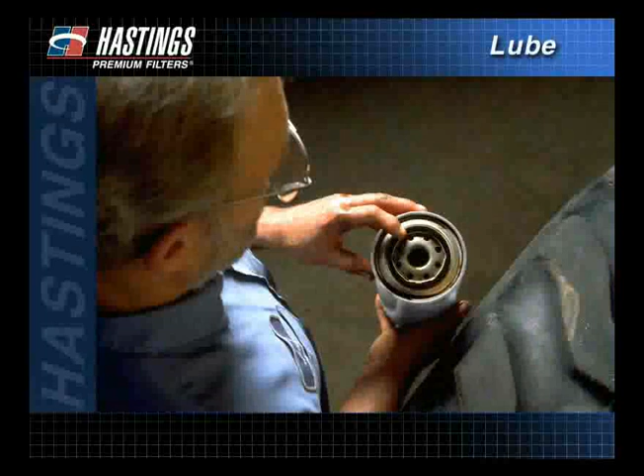Even with proper oil and the best filter system, problems can occur. As part of your maintenance practice, occasionally inspect filters to detect the beginning of serious engine problems.

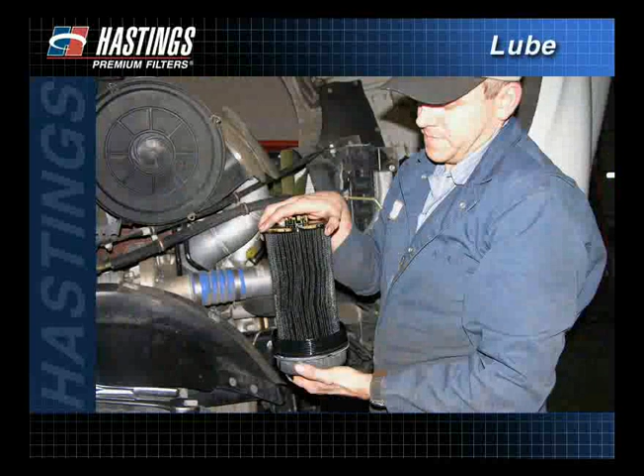With a cartridge-type filter, the analysis is easy. Simply take the filter out and look at it.

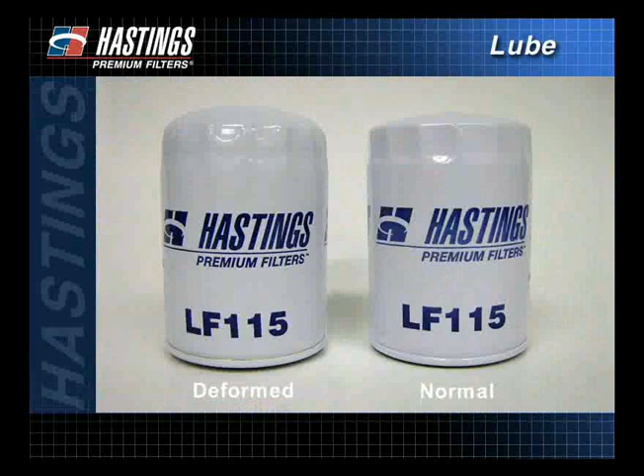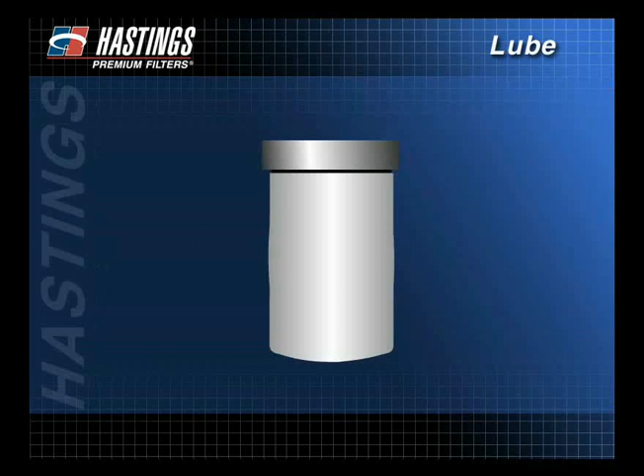Spin-on filters, however, need closer inspection. Often a deformed spin-on filter, due to overpressurization, is the only sign an equipment owner has that a problem exists in the lube system. Deformed filters are the direct result of excessive lubricating system pressure, which is caused by a stuck or malfunctioning pressure regulator valve in the oil pump assembly. This problem should not be attributed to the filter.

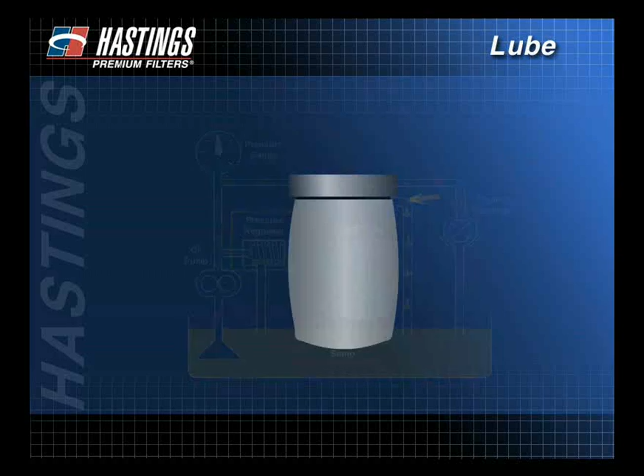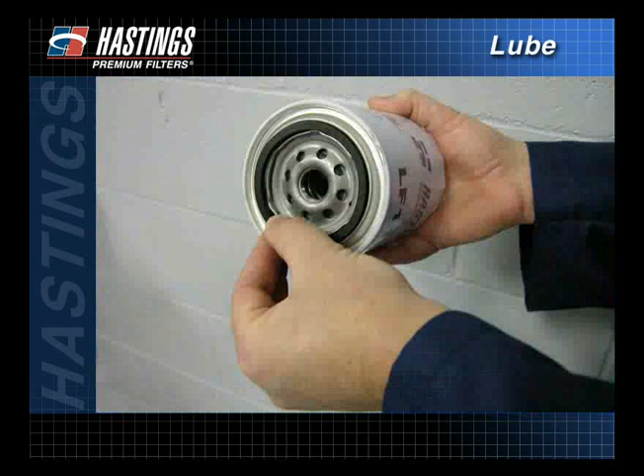Gaskets are displaced from filters due to excessive lubricating system pressure, insufficient gasket compression, or a combination of both. Generally, if the gasket is properly installed, the filter will become deformed before the gasket is displaced.

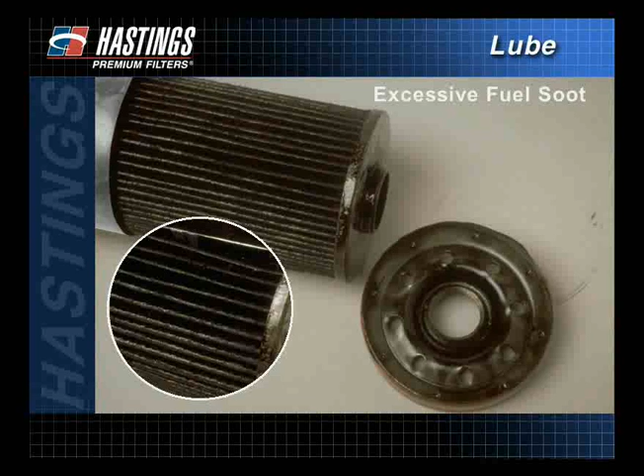Inspecting the inner element may detect additional problems found in the lube system. If the media is covered with a thick, loosely held sludge, it is an indication of an excessive amount of fuel soot. This could be the result of a wide range of factors. Many can be readily eliminated by a mechanic who knows the vehicle.

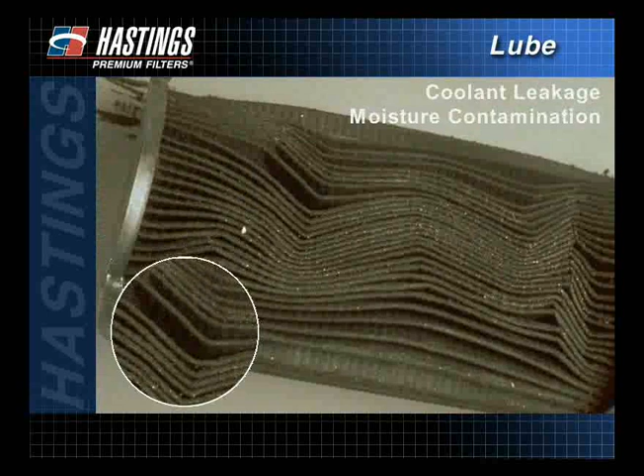Coolant leakage or moisture contamination will cause wavy pleats in the media and deterioration of the wrap. It may also cause a sticky, shiny, tightly held sludge on the filter media. A deteriorated outer wrap is another sign of moisture.

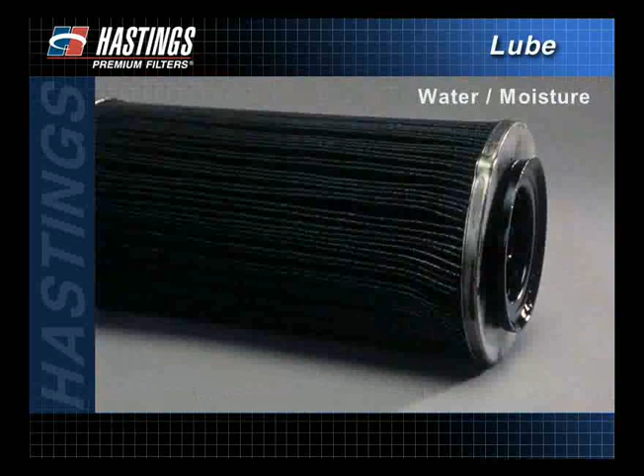Certain oil additives will trap water and cause a gel-like coating on the filter media. It may appear clean, but when tested, will show a restriction if moisture is still present.

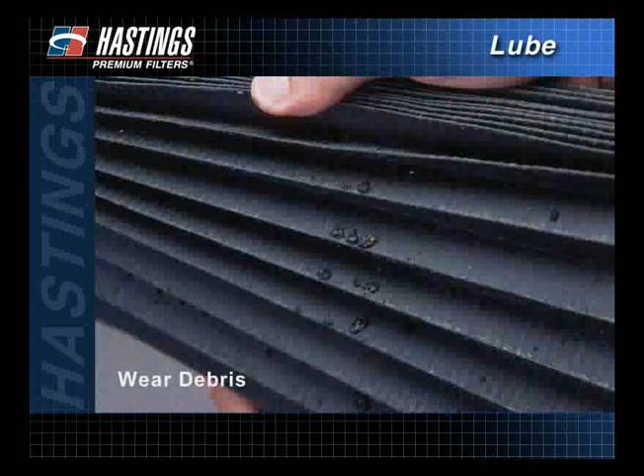Any wear debris on the media is a sign of trouble. An oil analysis can detect potential problems before catastrophic damage occurs.

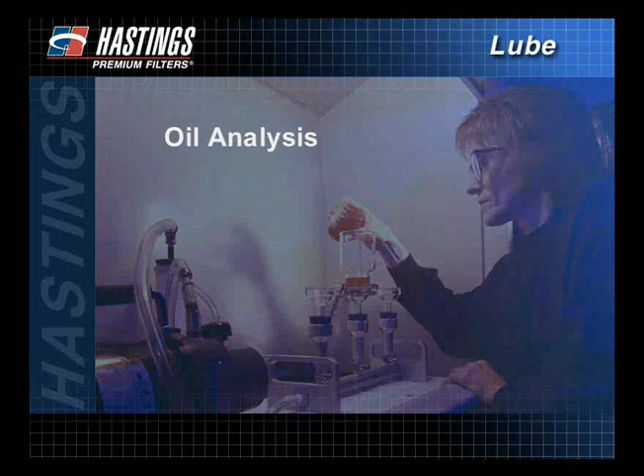Lab technicians can detect changes in lubricant viscosity, whether it has thinned from fuel dilution or thickened from contamination. Tests can also check the acid neutralizing additive to make sure it's still guarding against corrosion.

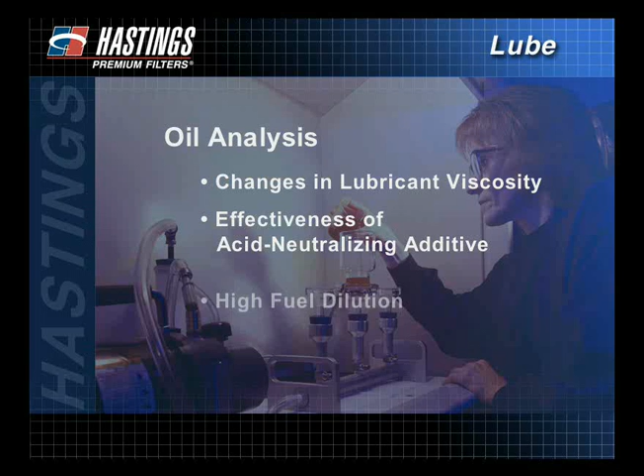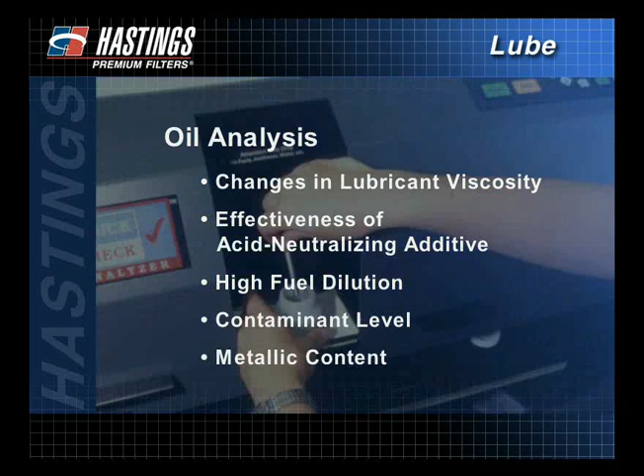Flashpoint tests can indicate high fuel dilution. A measurement of insoluble particles will determine the contaminant level, and the final test for metallic content is invaluable in determining the location of wear in the engine.

Keep in mind that although many improvements have been made in oil quality and additives, lubricating oil has a limited lifespan. Filters also have a limited lifespan. If they are run beyond their capacity, they can no longer provide protection to an engine.

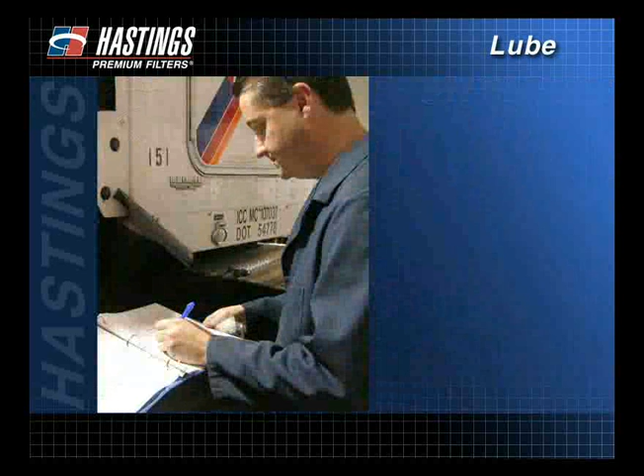That's why establishing drain and filter change intervals to incorporate economy with maximum protection is ideal. Many factors must be considered when determining a proper preventive maintenance schedule. Charts and guidelines plotting recommended change intervals are available from the engine manufacturer. Always follow the recommendations, and before extending drain intervals, discuss it with your engine and oil suppliers.

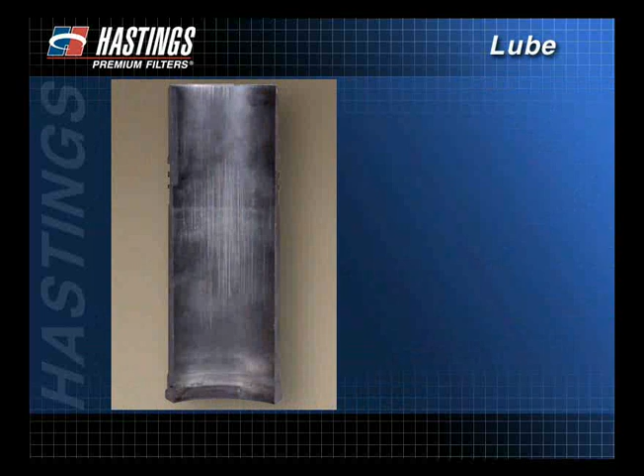Engine parts will tell if a proper schedule is being followed. By reading the writing on cylinder walls, pistons, bearings, and other sealing surfaces, a fleet manager can determine whether his PM program needs attention.

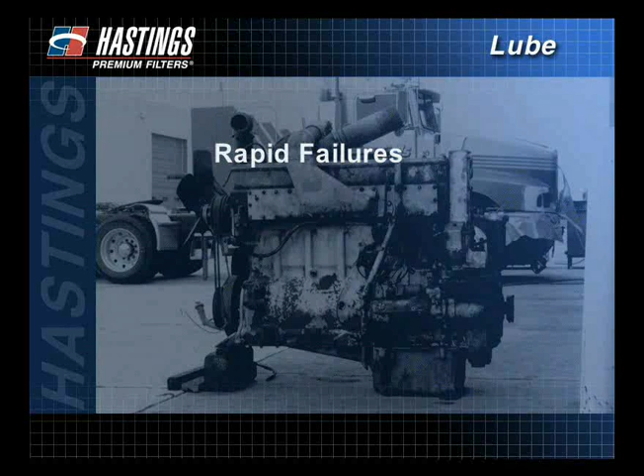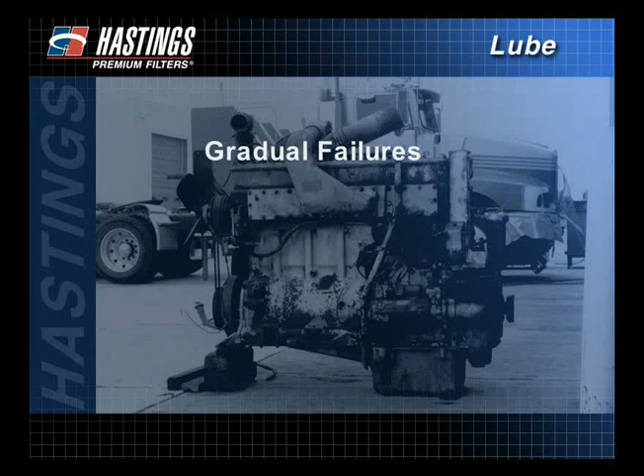Oil-related engine failures generally fall into two categories. Rapid failures are tied to obvious problems like oil starvation, gross contamination, or mechanical breakage. It's more difficult to find a cause for gradual failures. They are characterized by accelerated wear or corrosion resulting from contamination, additive depletion, oil of the wrong weight or classification, or any combination of those causes.

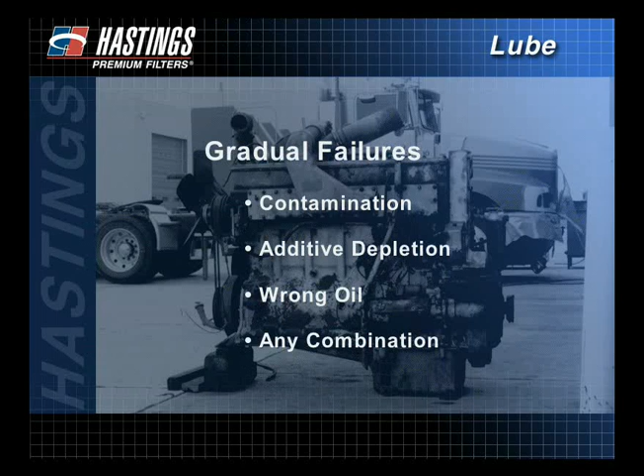By applying some basic troubleshooting techniques, keeping good records, and adhering to maintenance schedules, you can avoid serious breakdowns.